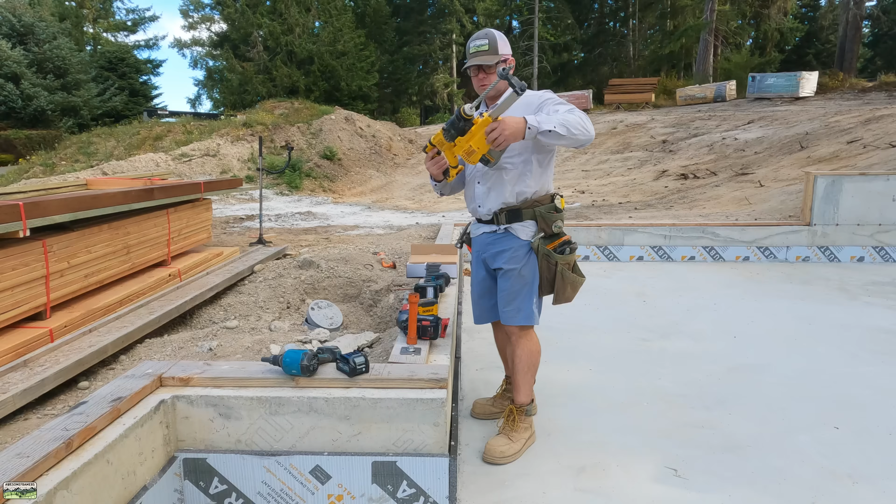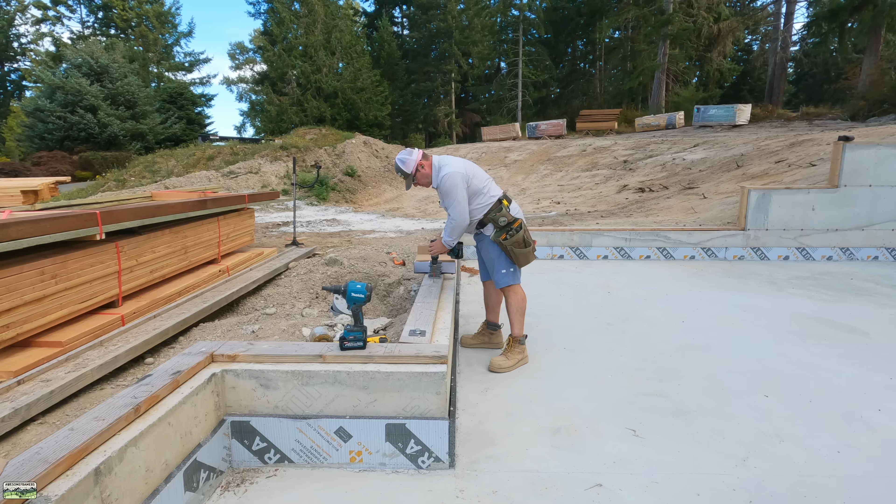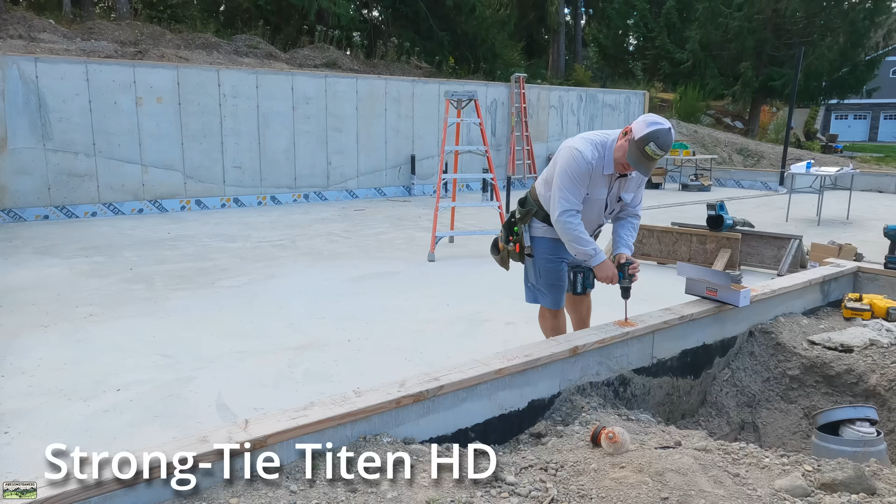In this video, notice that there are no cast-in-place anchor bolts. We are going to show you how we're going to fasten our mudsill with 5/8 by 8-inch Simpson Strong-Tie Titen bolts. These are heavy-duty screw anchors. Our engineer gave us the okay to use these. This job was going to allow us to track costs to see if it pencils out.

Okay, so let me just show you the basic way that we start. I have already laid out all of the mudsill for doors, windows, and studs, point loads, etc. Okay, so on this project, we got the approval from the engineer to use Titen HD, these are high-capacity screw anchors, in place of cast-in-place anchor bolts. I'll explain a little bit later why it is that we wanted to go that route, but here's the process for installing them.

That's not gonna work. Oh, come on. Oh, come on. Seriously? As you can see, I'm having some technical issues. So it's just the way that it goes. And I'm not done with the technical issues. You know, there's just a little lock on the side, and for some reason, anyway.

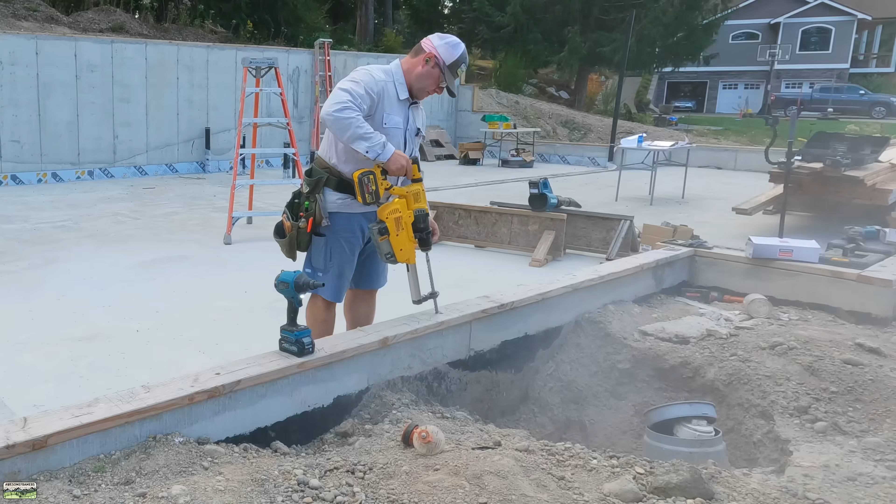Anyway, here's the timing for the first hole. Well, technically second hole, there's one in the foreground, but that one I filmed using my cell phone so that I could post it straight to Instagram. I'm gonna do this to a few of these bolts. Also, next time I will be wearing a dust mask. That little Makita blower there in the foreground is pretty slick. Anyway, you don't wanna breathe silica dust.

3 bolts total that I'm showing you the timer. And that's so that you as the viewer can make an informed decision on how much time does it take? Is it enough time or too much time? Not enough time. It always takes enough time. Is it too much time? You need to be able to judge for yourself if this is a process that you want to go through. For us, this is our new standard, and I will go through that here in just a little bit, why that's the case. I'm just bottoming out these bits. If you drill like an inch deeper than the length that you need, you don't have to blow out the holes. Like I mentioned, we don't want to be breathing silica dust, so that's a good thing.

Okay, so let me just explain how this all pencils out for us. In the previous video, I snapped out and then shot all of the mudsill down with that Max high pressure concrete nailer. That means I can put everything on the line and I can go fast just like I was using a nail gun into wood. Still having trouble with that little vacuum attachment. Now I can do my layout so that no bolt will ever land under framing.

I save time by not laying out my bolts and installing anchor bolt holders right before we place the concrete. So once we're done forming and we're braced, we're done. I don't have to go through and lay out for the bolts. When we come through with mudsill, we don't have to lay out for bolts. So the time that we save on both ends, again, you don't want to be breathing this dust, more than makes up for the time spent drilling, as long as you don't hit rebar. Because we do our own foundations, I can make sure that the rebar is out of the way.

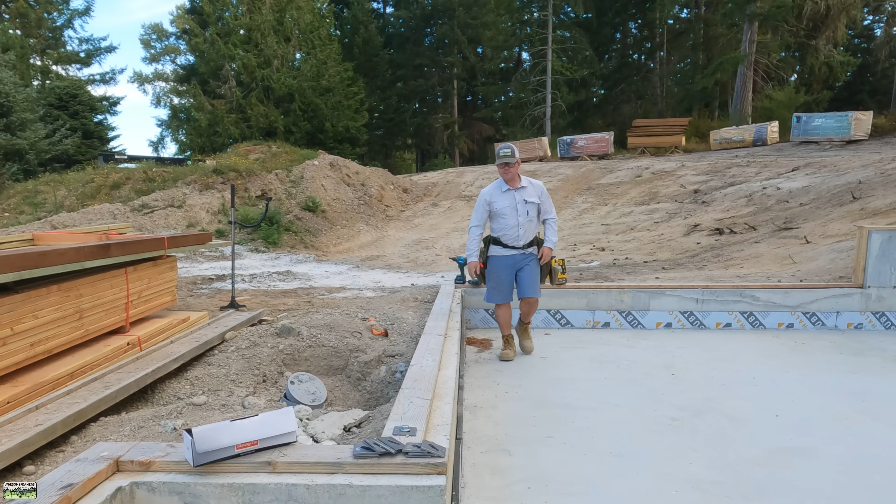Now, I would still cast in place hold down bolts, and that's it. Oh, and also Ufer ground. One thing I like to do is I don't want a pouch full of these 3x3 bearing plates. That's what our seismic code requires. That mudsill in earthquakes, if you use standard round washers, it will split out, but the bearing plates help to distribute the load. I am not an engineer. That is a conversation I've had with our engineer, okay?

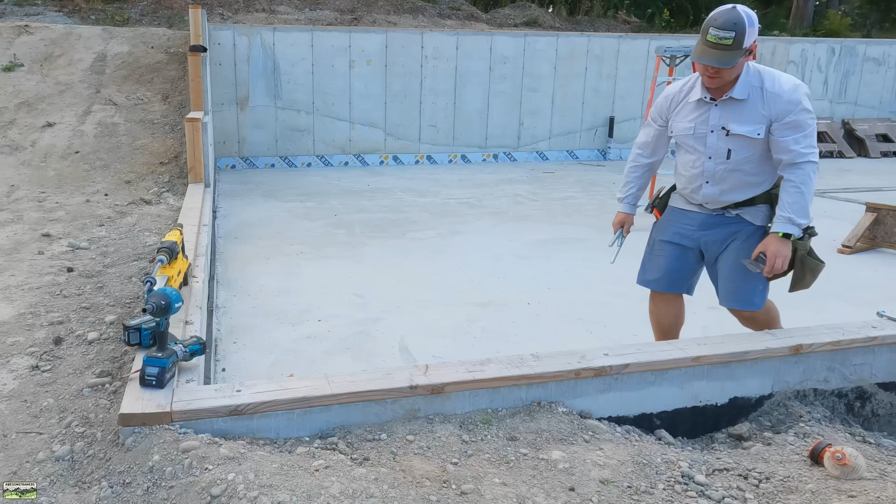So for production, what I like to do is go put all the bearing plates and the Titens in place, and then I can come around and install them all. That way I'm not fumbling for them in my tool bags.

This is the Dude Tools deep socket. It is not cheap. I think we've had this thing for 15 years or so. Probably look it up on Amazon. But it's perfect for driving. So basically, come on, Timmy.

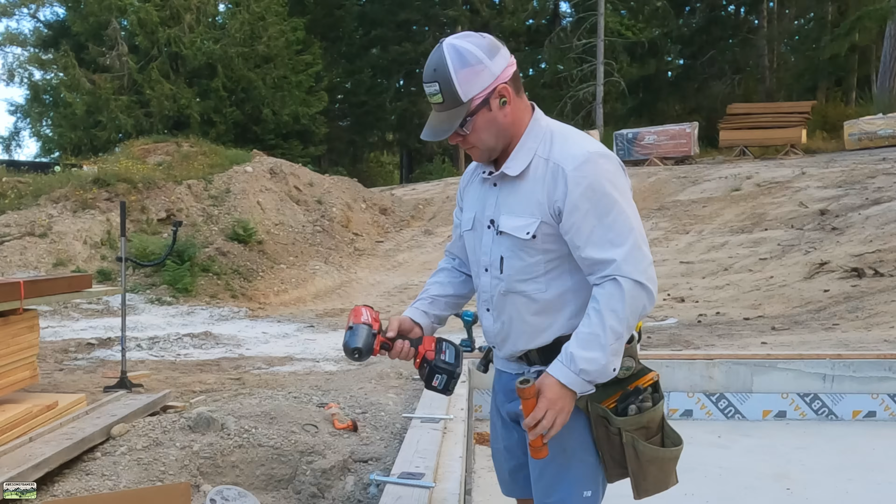So I'm going to use an impact wrench and a Dude Tools deep socket. We've had this thing for, I don't know, 15 years. We make everything 5/8 because this is not cheap. So buy once, cry once. We go with all 5/8 primarily because of the Dude Tools.

It all looks a little overkill, doesn't it? The deep socket is for those other times that we've needed a deep socket. That's why it's like 60 bucks US, or at least that's what it was 15 years ago when I bought it. We now use only hardware that will fit that Dude Tools, and that way we don't have to buy another one. So you could argue a lot of things.

We are way overkill when it comes to foundation anchorage, because instead of a 1/2-inch bolt every 5 feet, we're a 5/8 bolt every 4 feet, which our engineer says is great. He loves it. As I drive these, and we do want that higher torque impact wrench, I just hold that washer so that it's nice and square. I don't want it oblong.

Sometimes, if it's on a 45, as an example, maybe a framing member is close to that. Some people have told me their engineers want them rotated so they look more like a diamond. I'm making them nice and square and parallel because I like the way that it looks. That's it. That's all. Okay, let's go over some basic layout.

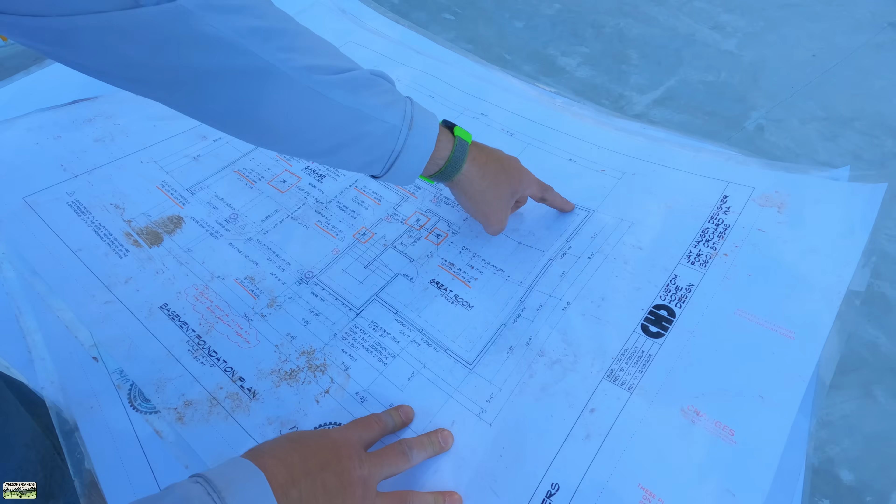So we're down here in the basement. We have already snapped perfectly square using the laser, and all of our exterior mudsill has been set. But I want a reference point downstairs that I can use for layout. So I have this wall. I'm not going to go to the plan number. I'm going to go to what's actual, because I probably cheated something. See how the inside of the 2x6 wall turns to 2x4 all the way through to the back? So here's how we adjust if we've already adjusted, if that makes sense.

Like, give me a good 6 feet. Yeah. Okay. That's what you look best at. Well, some would say 30 feet.

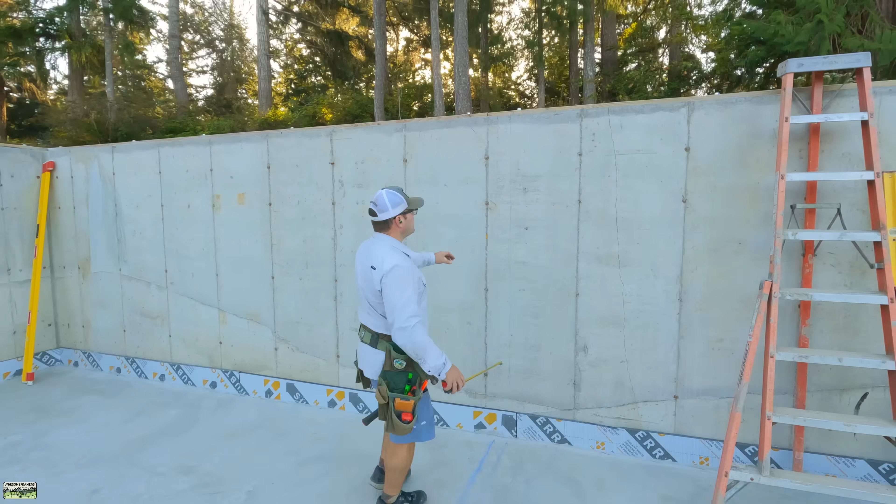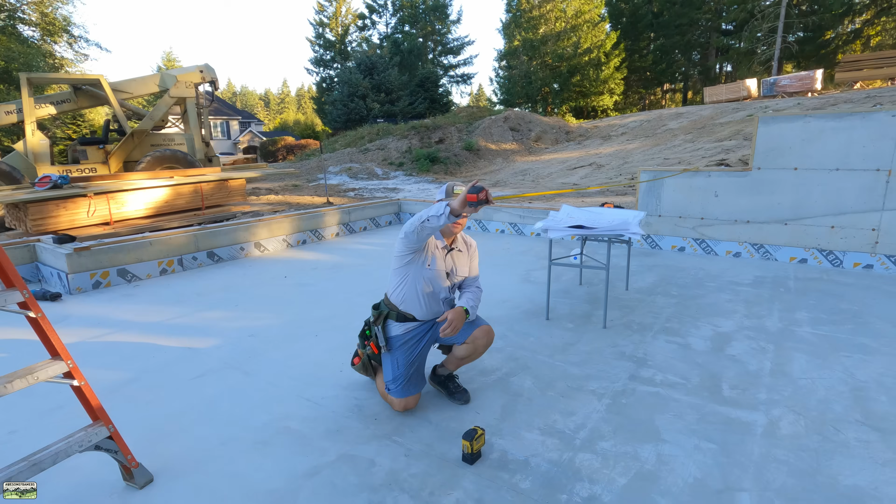Okay, so this line is what we just showed on the plans. I have 199 3/4. Let's go over here, Noah. From up above, that is 199 3/4. I plumbed down and we've already snapped through. So now, since I'm snapped through, I'm going to use the laser plumb bob up, because I'm about 3.5 to 4 feet up. Let's see if we're at that 199 3/4. Okay, so I am at 199 and 15/16.

I don't know if you can see that. So Noah, what's 199 3/4? What's the difference? 3/16. Okay? So now I know that this line is essentially parallel to that. The 3/16, I'm not surprised, and I'm not going to sweat that. Now I have a reference point that I can go everything else parallel to without having to get a laser plumb bob out for everything else.

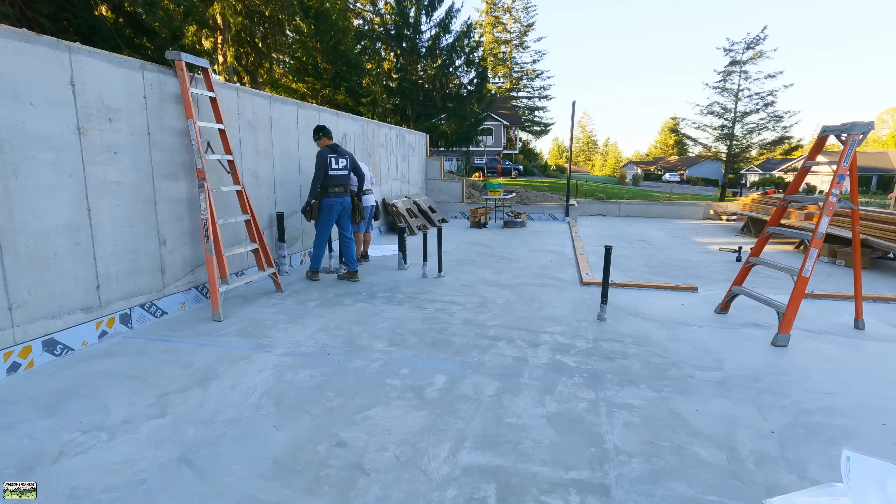Did you show the laser? Okay. Better. And for your purposes, let's always go to the line closest to that line. Yeah. Okay, so I have 100 and 3/16. All right. Go ahead, let's go here.

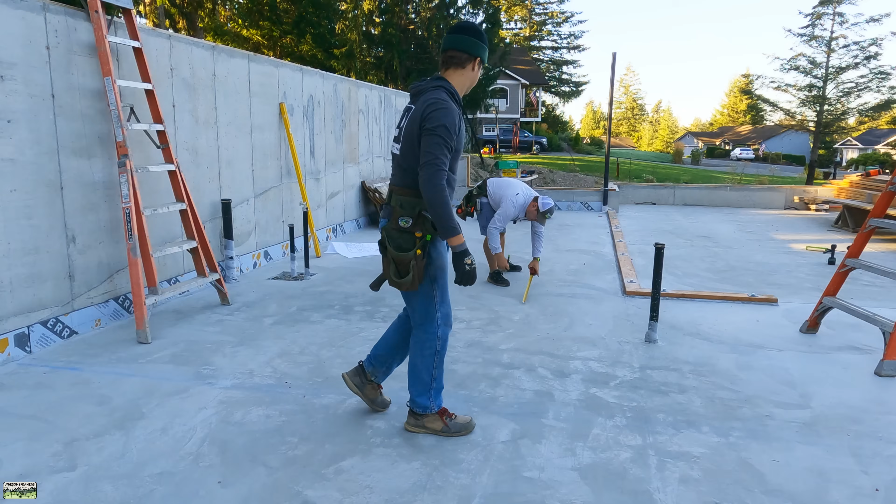100 and 3/16. Go ahead and let go. I'm going to add 5.5. And we'll just stay in the same rhythm. Okay. Yep. Did you have 5.5 on the side? I do not. I don't, man. I don't. And then we'll see how well the plumbers got their pipes in. It's looking pretty good to me.

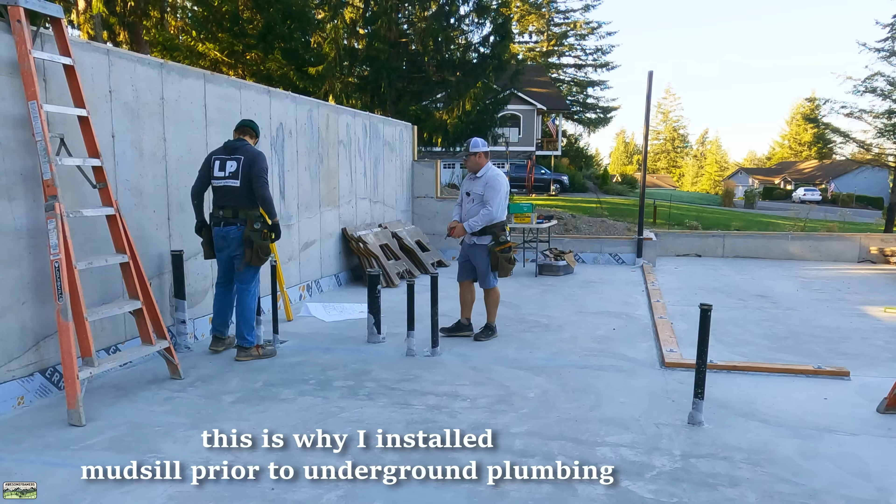Okay, and remember, which one are we always doing first? One closest to the side. Giddy up. Here, I'm going to go on this side. All right, you good? I'm good. All right, up and over. Are you good? Yeah, no, I mean, those pipes, look at that. They're basically centered. And that one too. So we're fine. The tub trap gives them quite a bit of room. So we're just going to leave that as is.

Okay, and so the next one, you tell me what we want next. We want, I can't read what that is, but this wall. Yep, exactly. So I already laid it out up above. So I'm going to go ahead and plumb it. Okay, I have 169, 169 and 1/2. Okay. And that is outside to it. We're going to go all the way to this wall. 169.5 outside to it. Go this way. You want to stay parallel with me? Yep. 169.5 outside to it. Go ahead and let go.

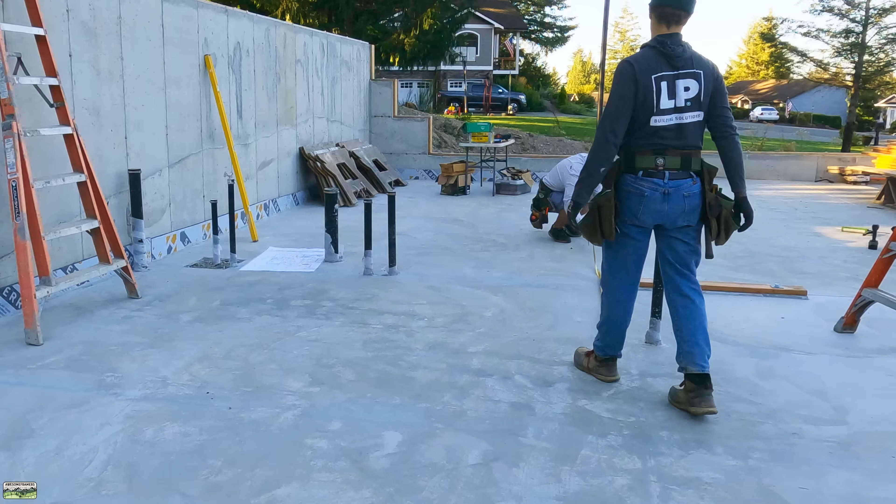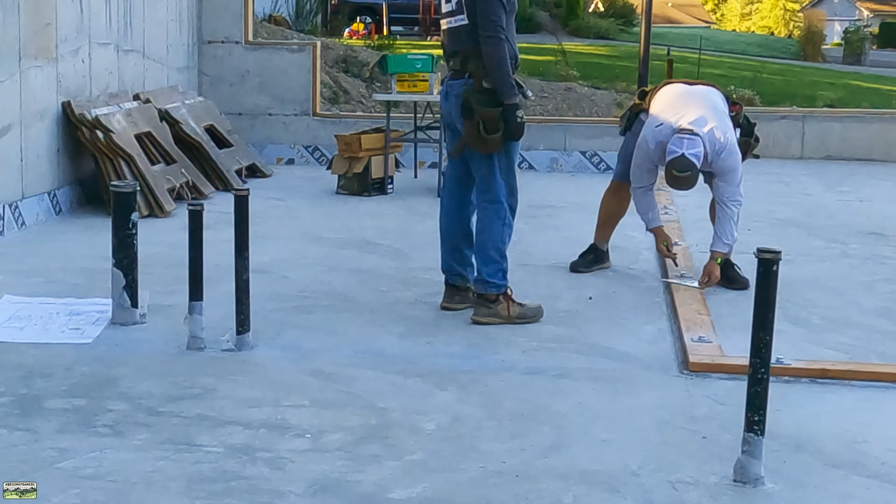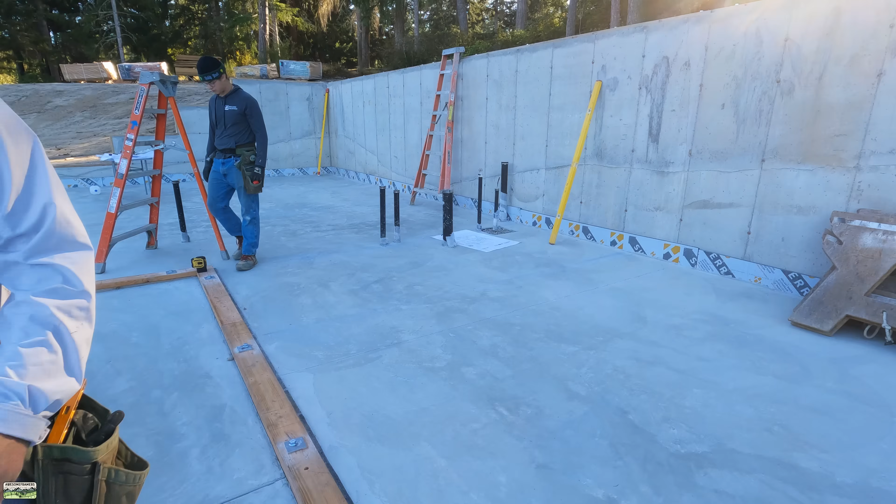I'm going to go plus 3.5. So this is our wall. It comes all the way through and has that doorway. So now I'm going to go square off of this. All right. Good? Yep. Next. Good. All right, dog. So now, because I want to make sure that we're parallel. It's because I snapped this all out by myself way back in June. Mm-hmm. Oh, yeah, I remember. Okay. So what I'm going to do.

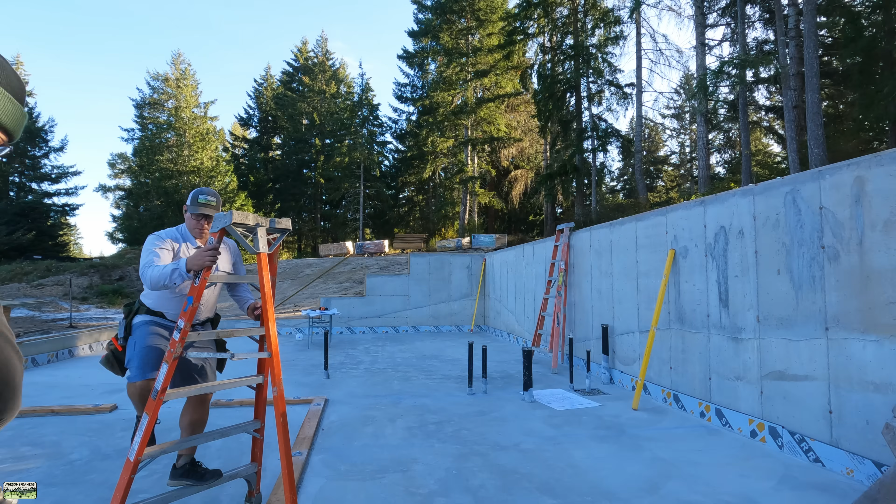All right, so what is that? 164.25? Yeah. All right, 164.25. Let's go check it. I don't know. It was like that. And it needs to split. Oh, okay. Otherwise, you know, we basically want the corner. Okay. So what was the number? It was 164.25. That's what I had. I remember the number. 164.25. Aha, man, that's awesome.

So the way I did this is I set up the laser. I measured some random number, whatever it was. I came down below and burned on the laser dot, and then I marked what the actual plan number was. Okay, so what that means is that we can use this wall as our reference point. That's good. So let's always turn this off since it's green. Yeah. I do have a load of batteries.

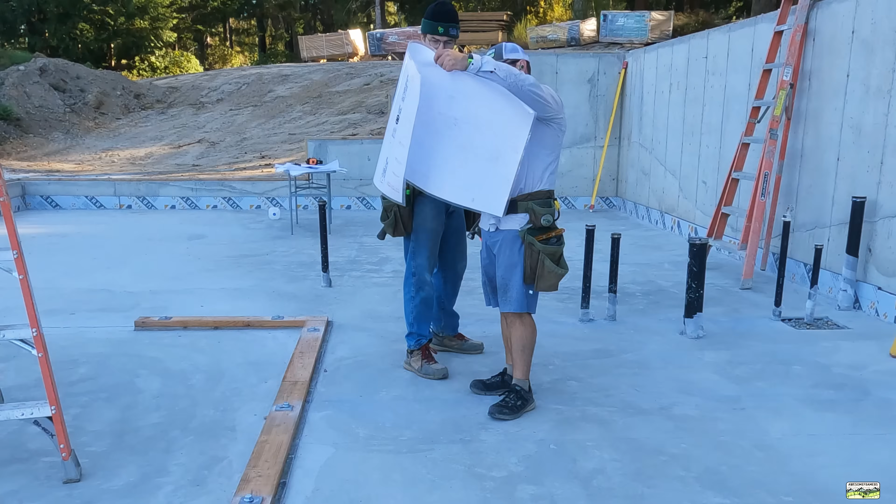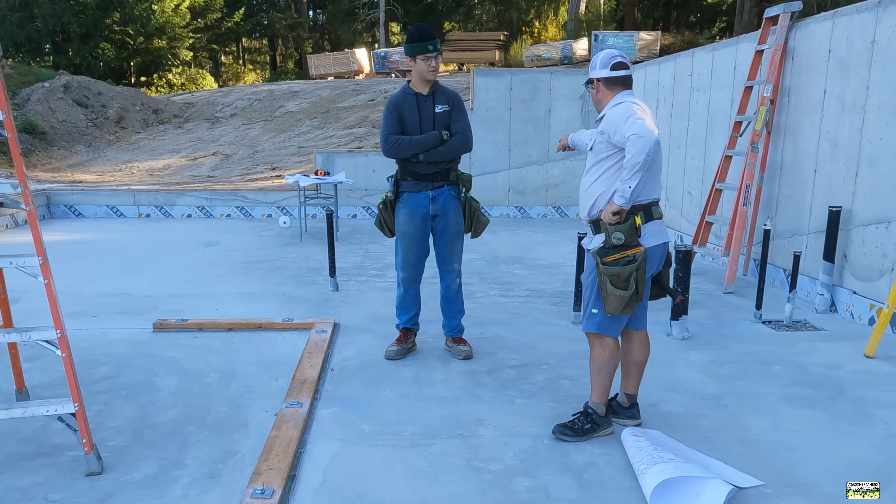Oh, that's good. Okay, so in order for us to do this hallway, we can go off the plans. So see how he's got a door? It's a 2/6 door. We're going to make this hallway what he shows. So what should the hallway be as an inside dimension? 4 foot. 4 foot. So now, if you go, let's see, you can't do that, darn it. We can't pull that through. Okay, here's how we're going to do that. I'm gonna butt and go 4 foot and 4 foot 3.5.

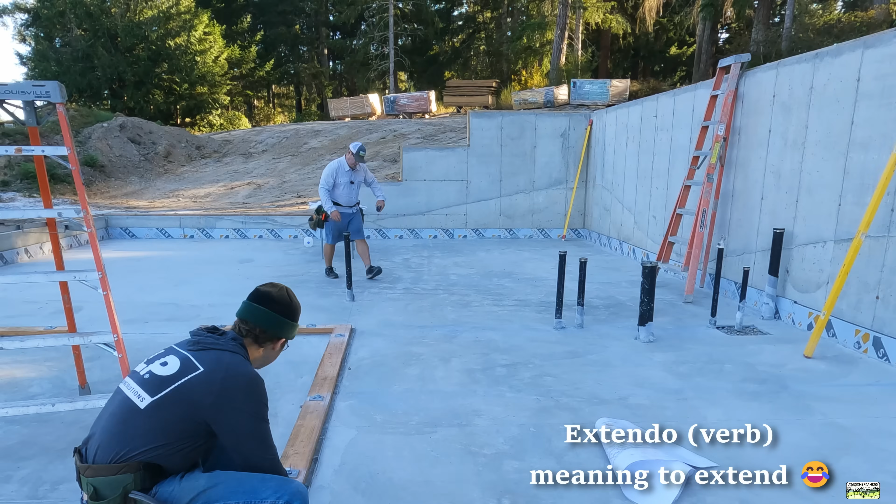Now, if you hold my chalk line, like, I don't know, back there, we're just gonna essentially extend this. So like right here? Yes, exactly. So how are we looking right there? Oh, I'll hold on to the top. And I'm holding it high. Yeah. That looks good to me. Okay, I'm gonna mark that. I'm gonna check it with my square. Looking good? Yeah. Okay, let me go ahead and roll this up. Now I'm gonna mark 4 foot and 4 foot 3.5.

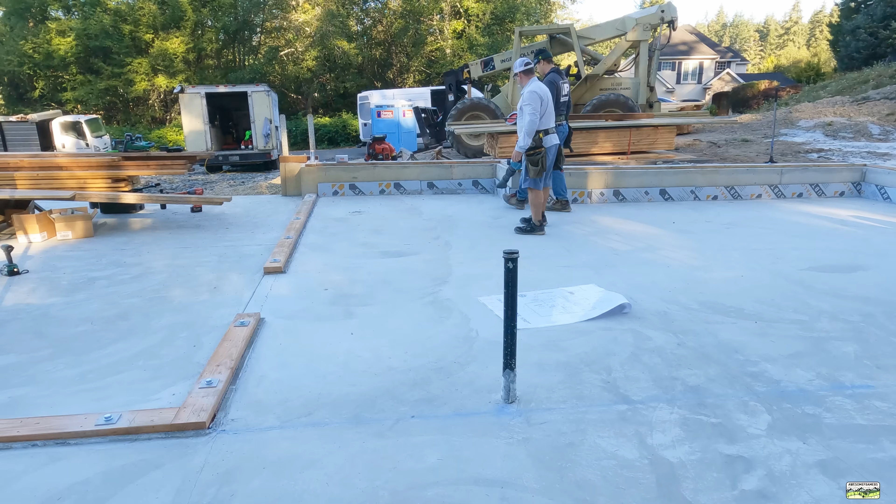I always like to have everything clean so when we snap we don't hit rocks. Yeah. Okay, so the stairway wall. Where is this? So there's the stairs. Okay, that's what I thought. So what we want is this wall to be dead center on the stairs. Okay, I have 10 5/16. So that would be 5 and 1/8 strong. And that's a center mark. Let me double check it.

Yep. So what I'm going to do is I'm going to go 1 3/4 each way because that's a 2x4 wall. And then I'm going to take a new number off of this guy. Which one did you hold it on? That one. Okay, hold me there. So I have 48 3/8. Let's go way down here because this wall goes all the way through to here.

Grab it, man, grab it. 48. Did I say 3/8? Yeah. Okay, go ahead and let go. I'm going to go 3.5. Now let's snap this guy all the way through. You like it? I do. I like it a lot.

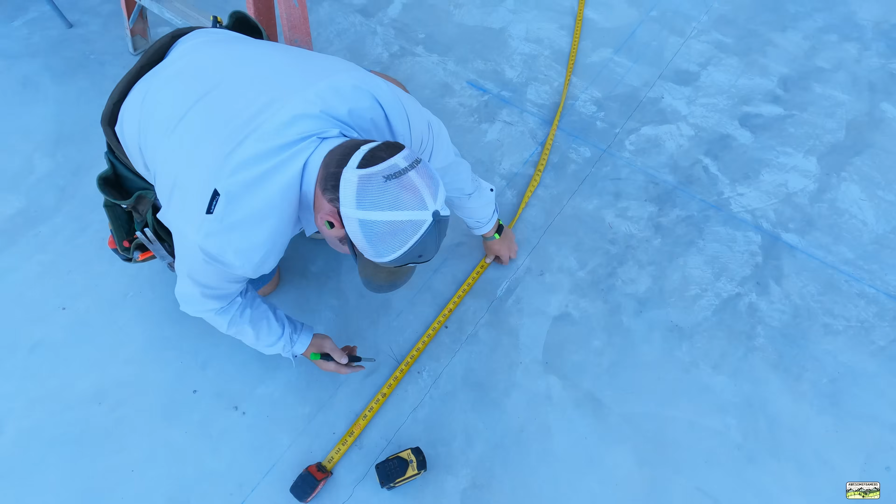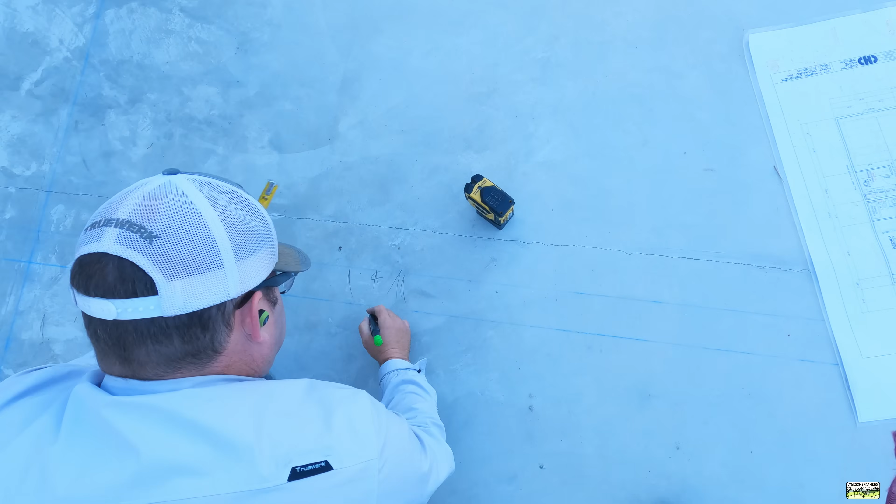Okay. Now it doesn't matter what that number is. And here's why. I want to stay parallel. So I'm hooking the back, keeping it parallel. Okay, I have 20 7/16. 20 7/16. So I have 20 7/16, but my beam is at 16'6" to the center. Oh man, I had that almost right on the money, just by eyeball. Okay, and I think that's a 6x6. So we're gonna have to lay that out through there.

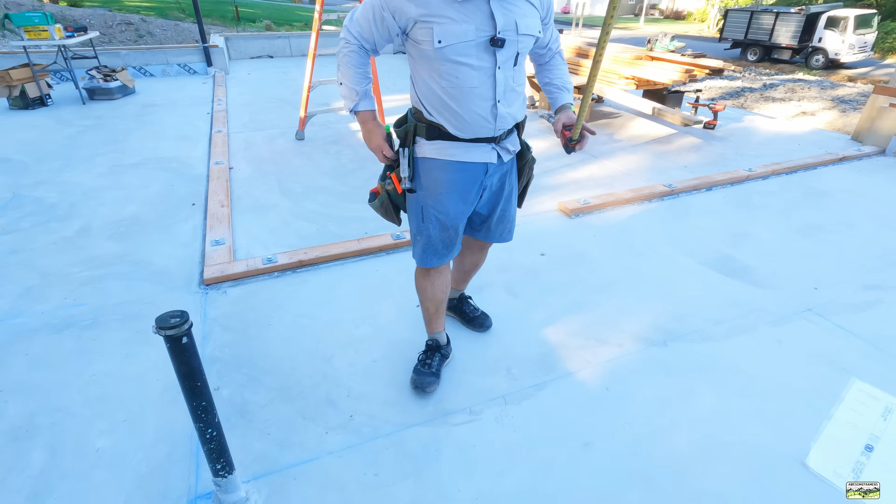In fact, if you want to film this, Noah, then I'm gonna go, that's an inside, I have 36.25. Let me come right here. 36.25 plus 5.5. 2x6 wall. Giddy up. Okay, let me see here.

We actually have a couple point loads. What are the point loads? Point load is the column that holds the beam. So imagine that your beam goes like this, and it has two columns under it. That's a point load. So think of a stiletto shoe as a point load versus flat wedge soles or skate shoes. So my load is distributed over both of my feet as opposed to just on a stiletto. So the force there is a lot bigger, and that's why stilettos will dent a hardwood floor, but cowboy boots might not. Huh. Okay.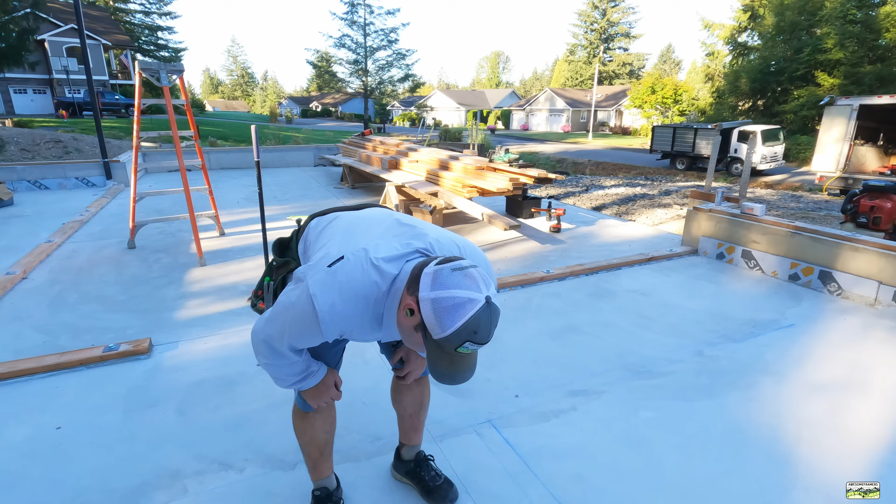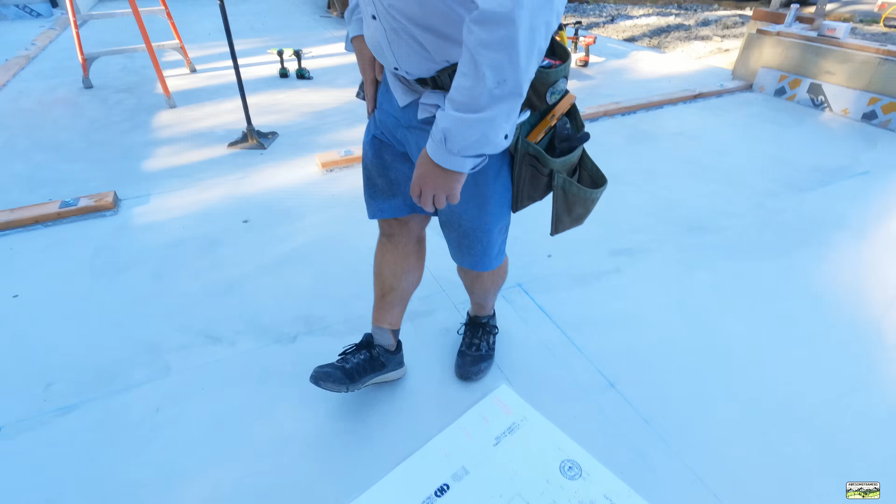So now what I have to do is find this load, which is from upstairs. So that means that's a closet. Okay, let's go ahead and put that back on the pole, and we'll just face it this way. All right, dude, so upstairs, we're 16 foot from the back to the center of the ridge beam. Okay. So I've already marked 16'6". So what I can do is, let's just say that's 2'6". So really, at 2 foot is the center upstairs. Does that make sense? Yes. You know, I guess the other way to do it is just go, if that's 16'6", so there's center of our ridge.

And then we need a number that corresponds. See, this is what is so annoying. All of these stupid numbers, all you had to do is give us this number.

Oh, yeah. So we have 4'8" from this 2x6 wall, which actually lines up with the garage. Wait, so you want this one? Exactly. So downstairs, this is the garage. You know how I know that? Because there's the garage, and then we have both sides of the stairway. Can you see that? Yeah. So if we go 4'8", butting the garage, then that's going to be, so really, I'm going to line it up. So 4'8",

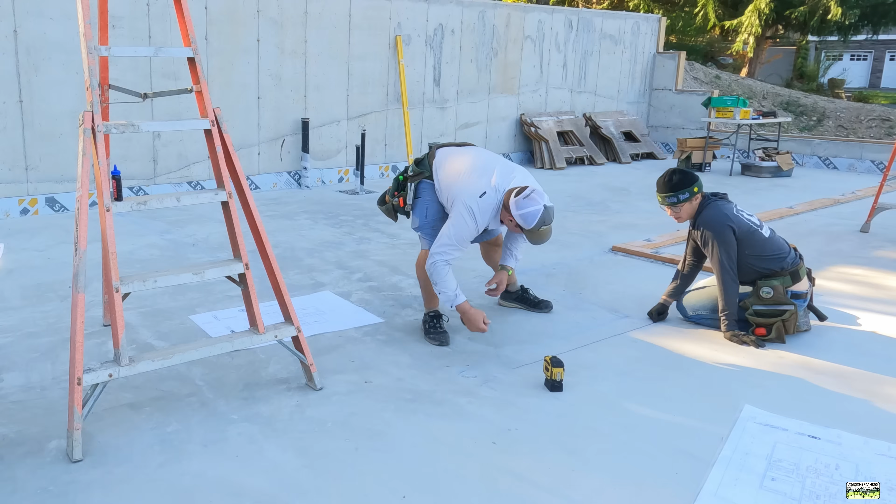Am I doing that right? Why is there 2 right there? I'm pretty sure that's right. Okay. That looks right. Let me double check. Oh, it's because that one was the laser dot. So you're right. We need to go to that one. Good call, Noah. Good call. Okay. That looks better. I'm just going to scribble this, because when I come through to plate everything, that's where it's going to start to get a little funky.

Right here. So what I'm kind of thinking, Noah, is let's just make this real simple for ourselves. 2 3/4, 5.5. And then this is a rather large linen closet. So what do I have? Go ahead. Yeah, you got 5.5. Let me mark 5.5. Let's snap this guy. Should have been that guy. Good. Okay, so that'll be a 2x6 wall. And then we also need to make this one a 2x6 wall.

Oh, even that doesn't work with this pipe. Yeah, I'm going to make that too. Let's just do it, because I'll butt that guy. So let's do this. I'm going to go 5.5, and then you would go 5.5 here. Okay, we're getting there. So let's go center to center, so inside to inside. I have 46 1/4, so 23 1/8 is center. 26 1/4 or 46 1/4, you say? Yeah, so 23 1/8. This one's a 16th longer.